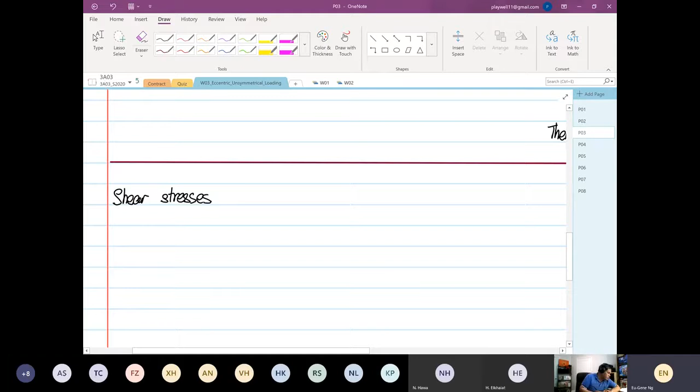And this topic is one of the most confusing topics in structure analysis. Okay, so we are going to look at shear stresses now. We're going to look at shear stresses. And if you were to look at your course textbook, the Beer and Johnston, it's chapter 6.1 to 6.3.

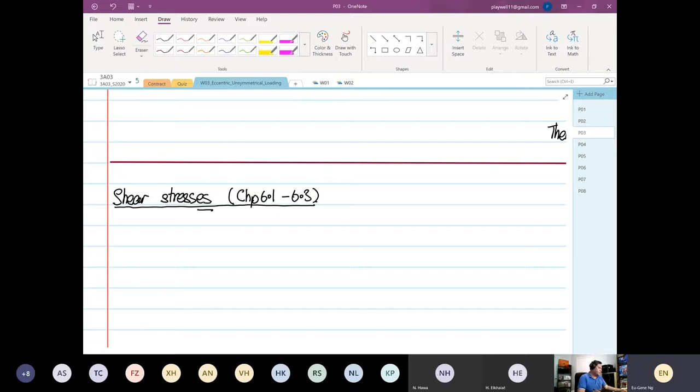Okay. As I said, it's one of the most confusing topics in structure analysis. It's because there are rules that you have to apply, and these rules are critical. And I'm going to derive for you what those rules are. Now, before we go there, we are going to find out what is shear stress.

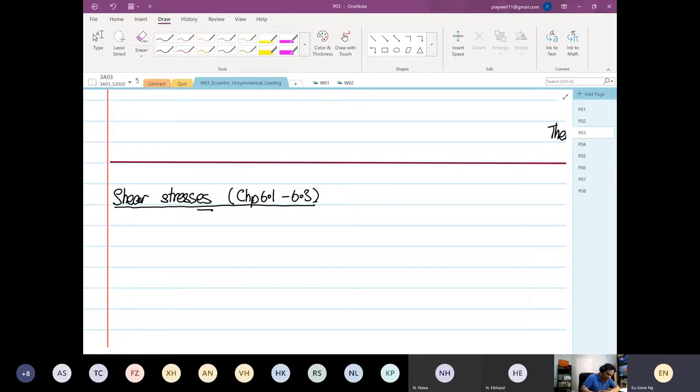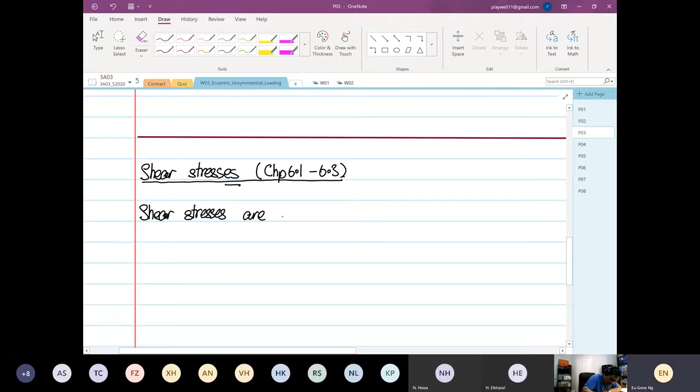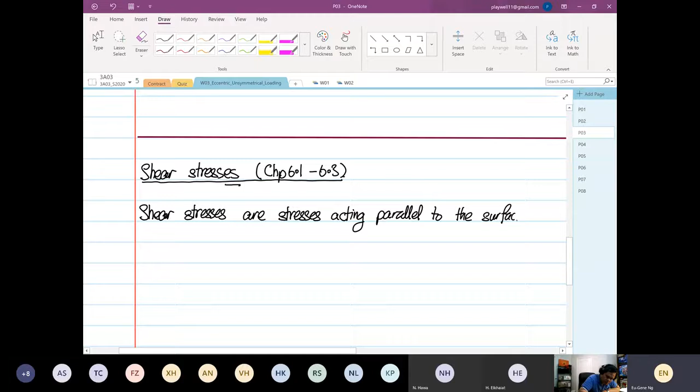So shear stresses are stresses acting parallel to the surface. Okay. So if I were to draw an element, we're going to construct an element now. We're going to construct a 2D element.

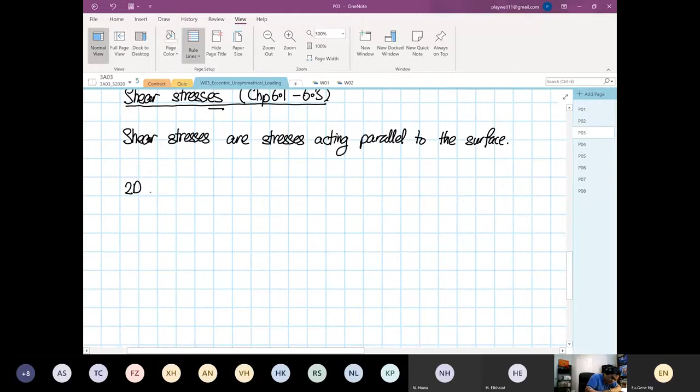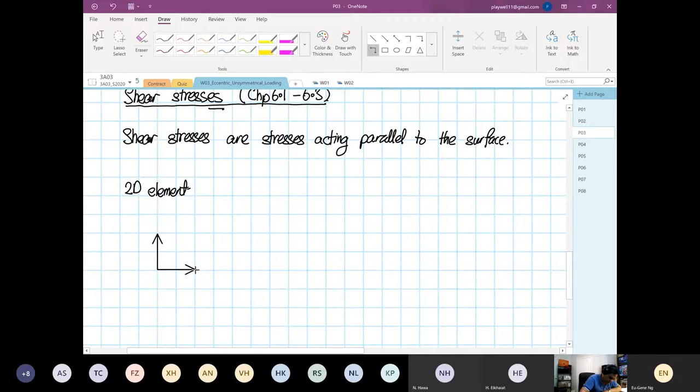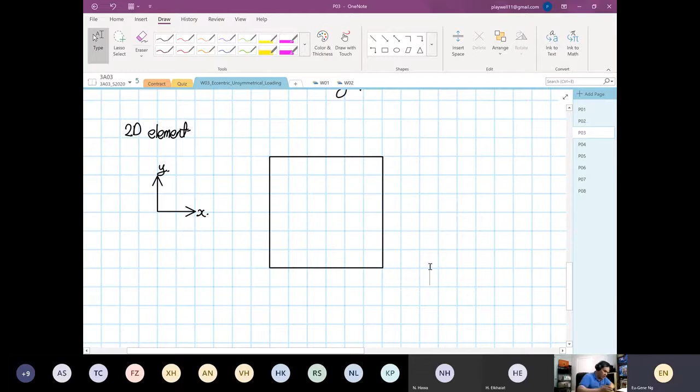So likewise, we have our transformation. So this is X, this is Y. So we construct the element. If we were to draw an arrow doing this now, this is the shear stress on the plane intersecting the x-axis multiplied by the direction of the force. Okay, the direction of the stress.

So I'll write this out. The first subscript means the intersecting plane. And then the next one, the y over here that you see, the second subscript on the right, means the stress acting direction.

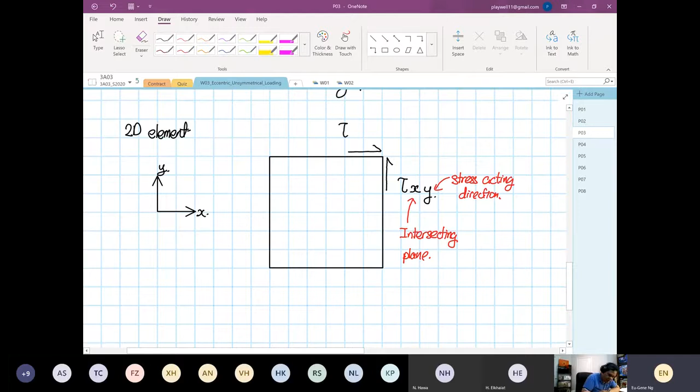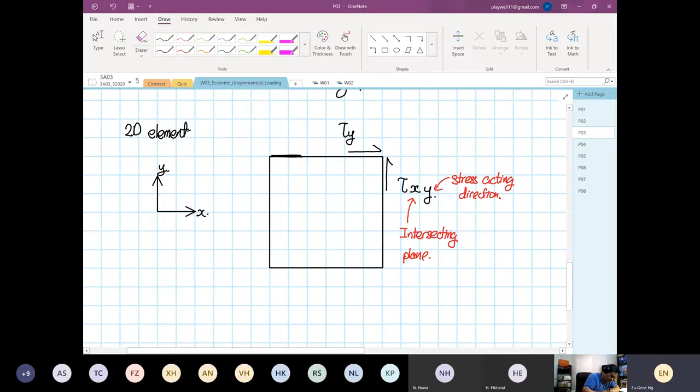Okay. So for this case, the top arrow over there is the shear stress acting on the plane intersecting the y-axis. This plane over here will intersect the y-axis, and the stress down here is acting on the x-axis. And to achieve structural equilibrium, we know that the shear in xy is equal to the shear in yx.

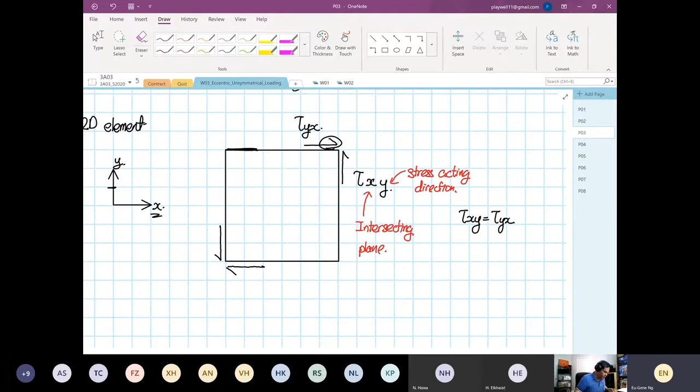Okay. So on the other side, you have the stress acting on the other configuration. Now, I'm not going to teach positive shear or negative shear yet. We'll leave that to later. But this is how the shear stresses are acting. Now, if we were to view this on the 3D element, we're going to look at this in a 3D element.

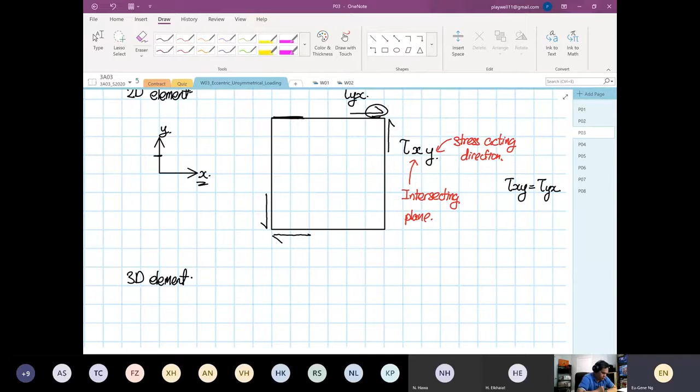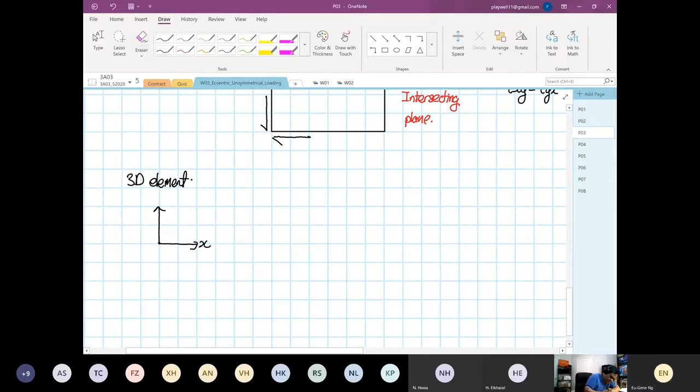Before I go into 3D, any questions so far? Nope, we are good. Okay, so if we look into 3D, this is our transformation now. X, Y, and then we have our Z direction. Now we're going to draw a cube. We're going to construct a cube. So this is our cube.

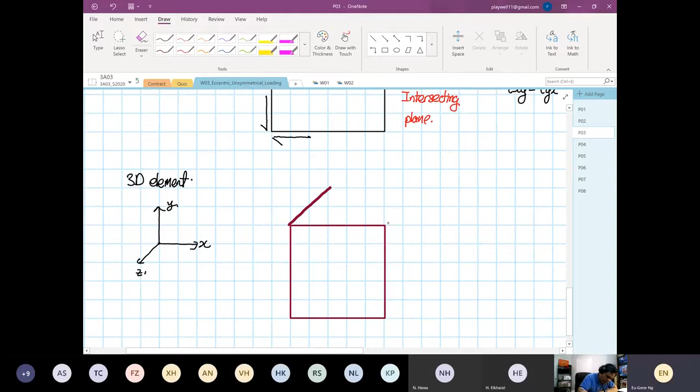Okay. So that's our shear, and that is equal to what? The shear on the plane that I'm writing on now. That plane intersects the z-axis, and the vertical direction of the stress is y. So this is equal to shear yz.

And then finally, the last one. So this is our shear direction. On the face that I'm writing on, this is shear in the plane intersecting the x-axis, and the stress is acting on the z-axis. So this will be equal to shear zx.

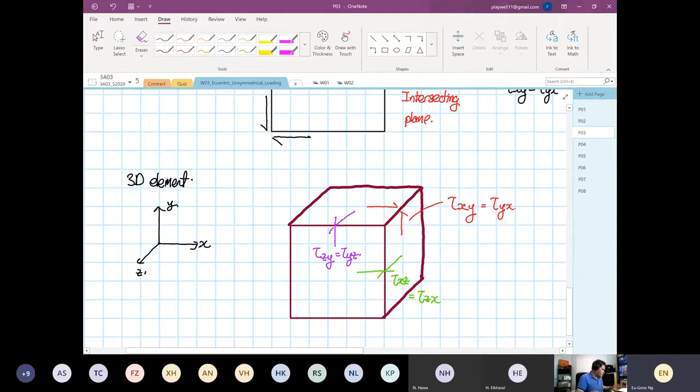Okay. At the start it looks confusing, but it takes getting used to. You need to know the first subscript defines the intersecting plane, and the second one is the stress acting direction. That's it, for now. As I say, I'm not going to go into positive or negative shear stress yet. We'll leave that for Mohr's circle.

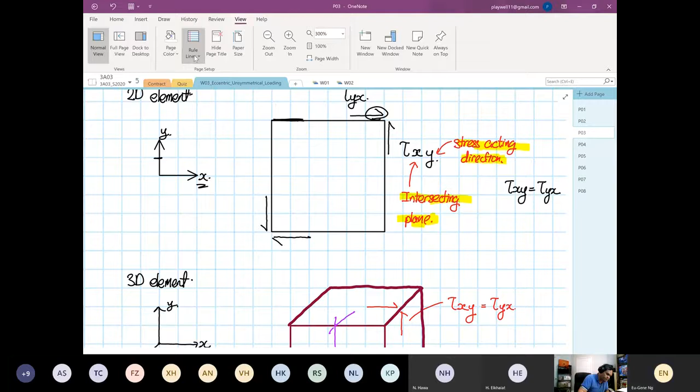Okay. Now the next thing that I would like to highlight over here. So far, any questions? Are we okay? As I say, it takes time to absorb this. Any questions, please? No? Okay. So the next thing that we're going to look at